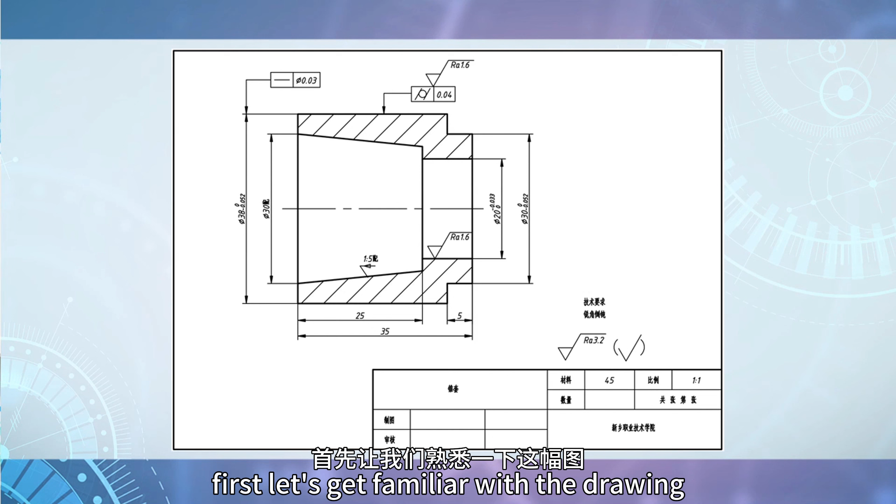First, let's get familiar with the drawing. The first step is to read the title bar. From the title bar, we can see that the part name is a cone sleeve. The material is number 45 steel. The drawing scale is 1:1.

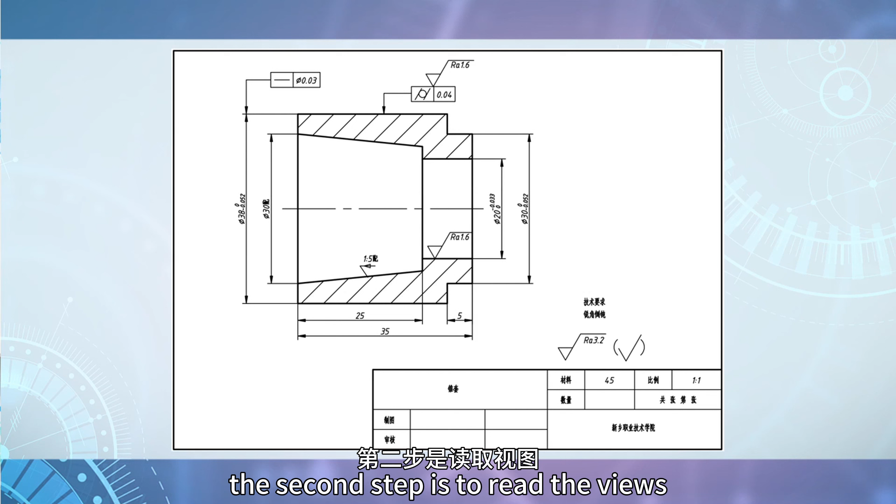The second step is to read the views. First, analyze the expression scheme. This part uses a section view to show the internal structure of the cone sleeve. Next, let's conduct a shape analysis. This drawing represents a sleeve-type part. The external shape is relatively simple.

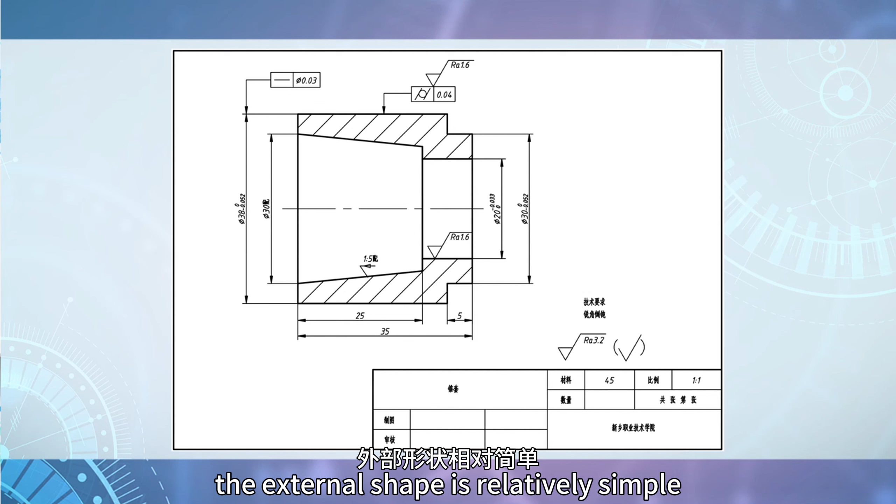It consists of two cylindrical surfaces. The interior consists of an inner cylindrical surface and an inner conical surface. Among them, the taper of the inner conical surface is 1:5.

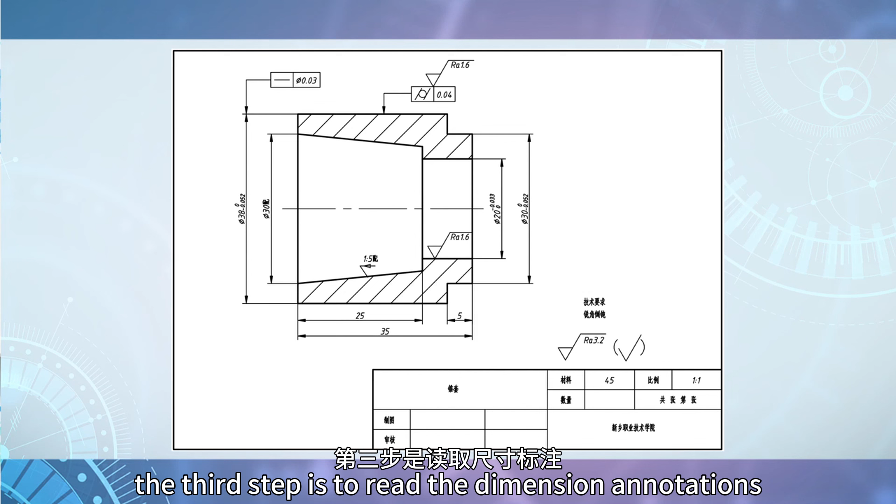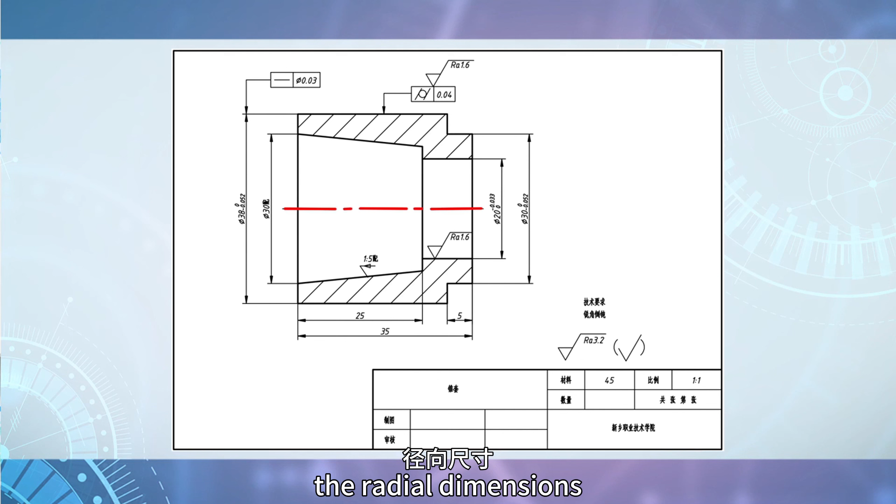The third step is to read the dimension annotations. Overall dimensions: the total length of the cone sleeve is 35, and the diameter is 38. Dimension benchmarks: the axial dimensions of this part are marked with the left end face as the benchmark. The radial dimensions are marked with the axis of the cone sleeve as the benchmark.

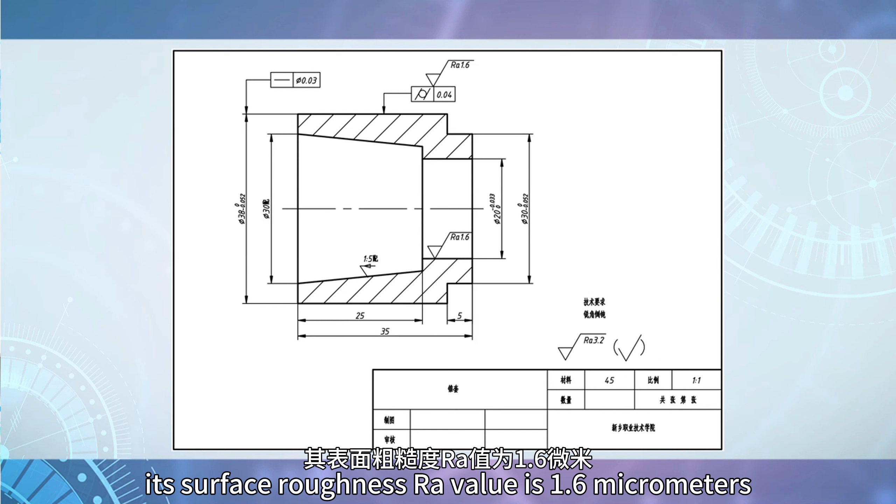The fourth step is to read the technical requirements. First, geometric tolerances. This drawing uses two shape tolerances, straightness and cylindricity. Second, surface roughness. For the cone sleeve, the outer cylindrical surface has the highest quality requirements. Its surface roughness Ra value is 1.6 micrometers. The Ra value for the remaining surfaces is 3.2 micrometers. Third, text notes. Sharp edges should be chamfered.

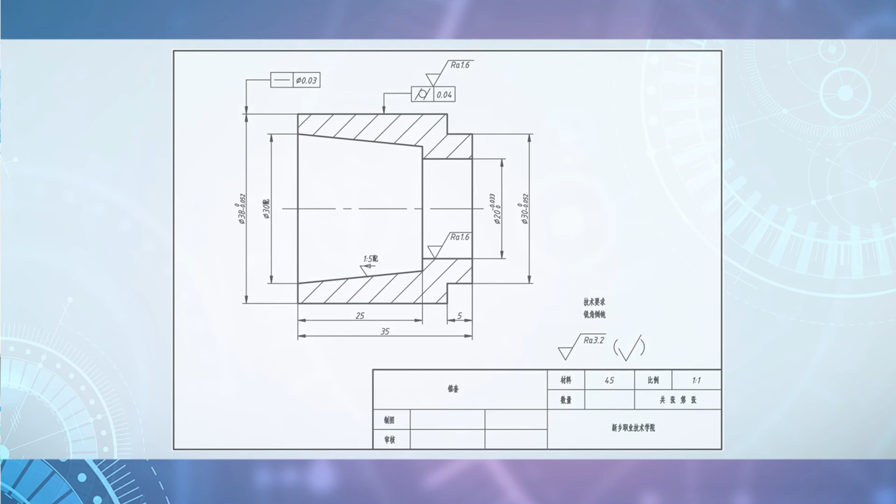When using views to express mechanical parts, the hidden lines on the contours should be drawn with dashed lines. If the internal structure of a mechanical part is very complex, there will be many dashed lines in the view. Too many dashed lines affect the clarity of the view and make it inconvenient for us to draw, read, and annotate dimensions.

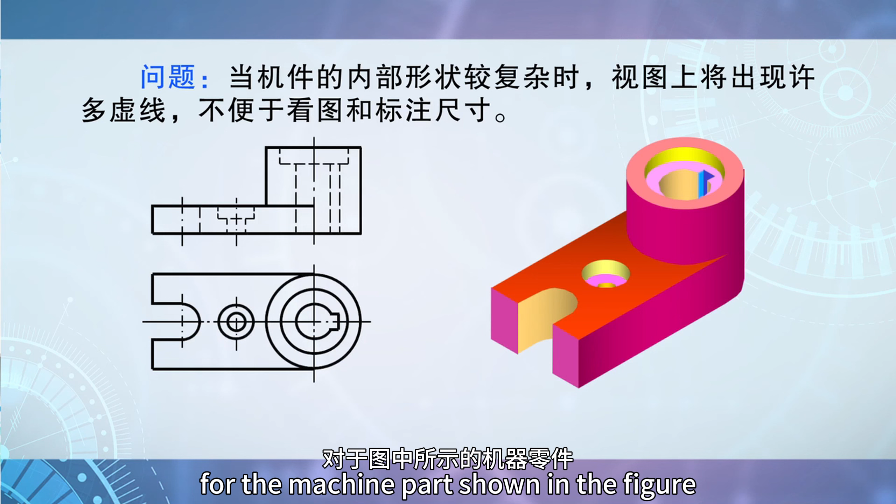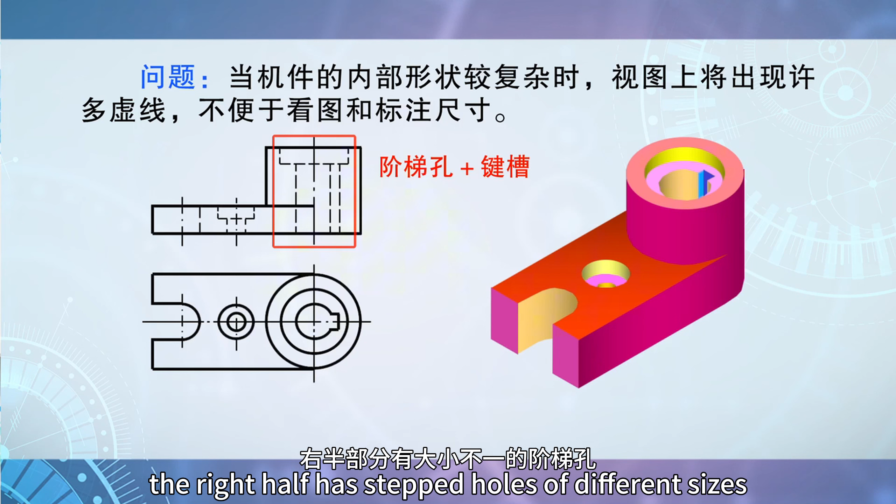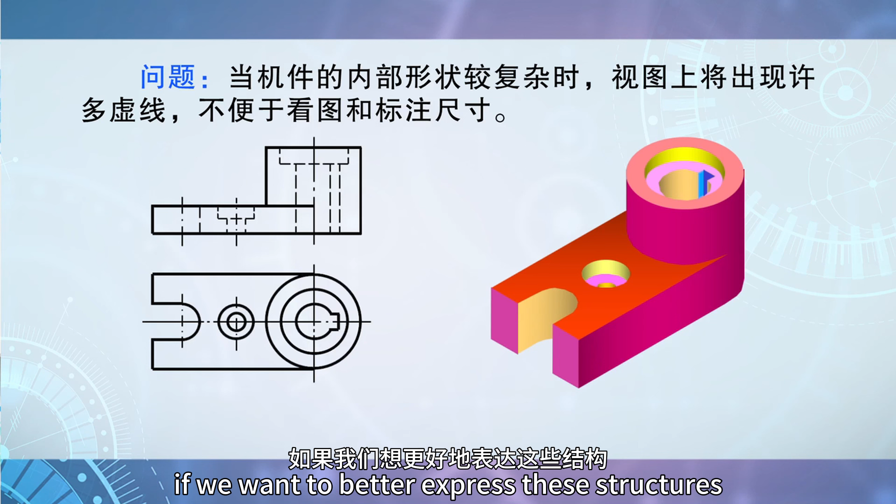For the machine part shown in the figure, the left half of the base plate has a U-shaped groove and a stepped hole. The right half has stepped holes of different sizes, and there are also keyways inside. This results in many dashed lines in the front view. If we want to better express these structures, what method should we use?

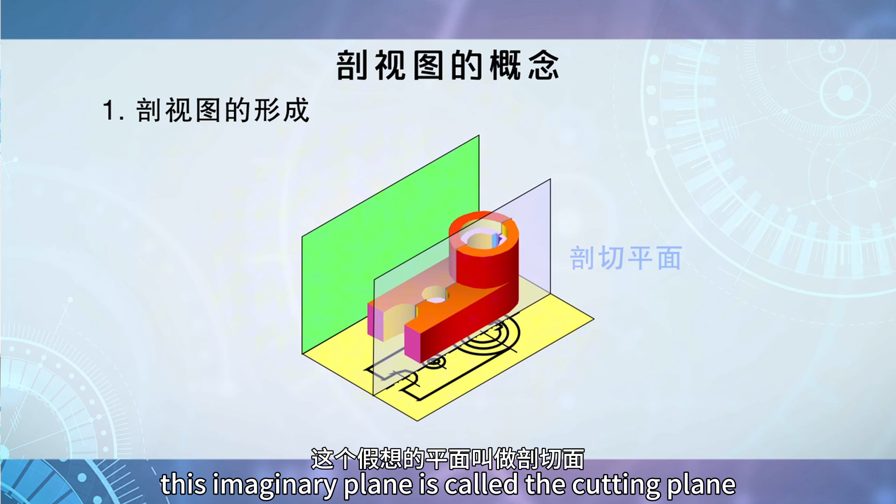Imagine a plane cutting through the middle of the machine part. This imaginary plane is called the cutting plane. We remove the part between the observer and the cutting plane. Then, we project the remaining part onto the projection plane. At this point, the various holes and grooves inside the machine part become visible.

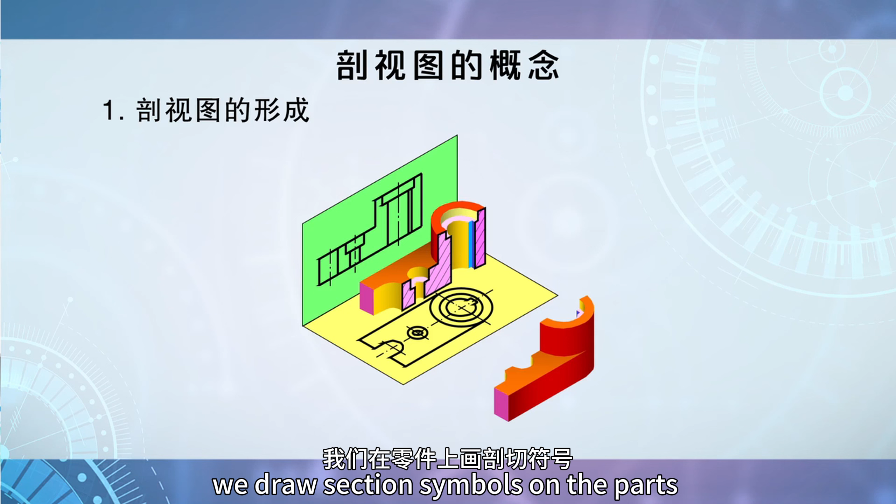To distinguish between the sectioned view and other views, we draw section symbols on the parts where the cutting plane contacts the solid body of the machine part. The drawing produced by this method is called a section view.

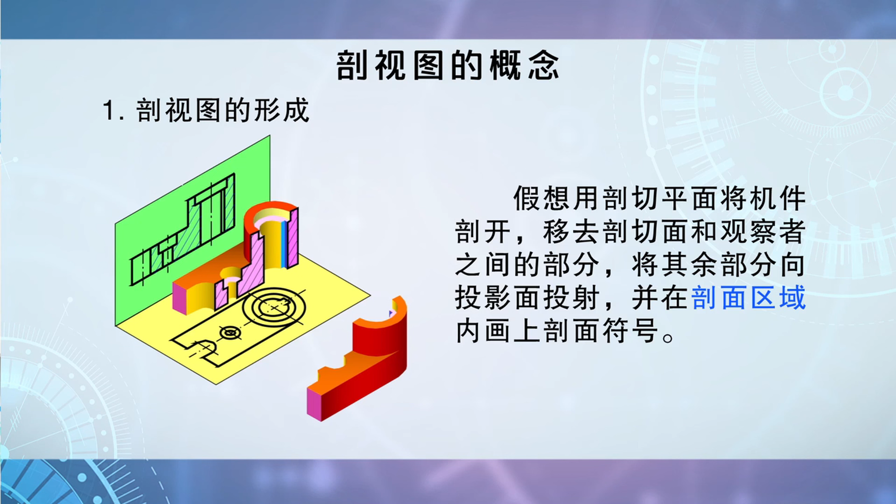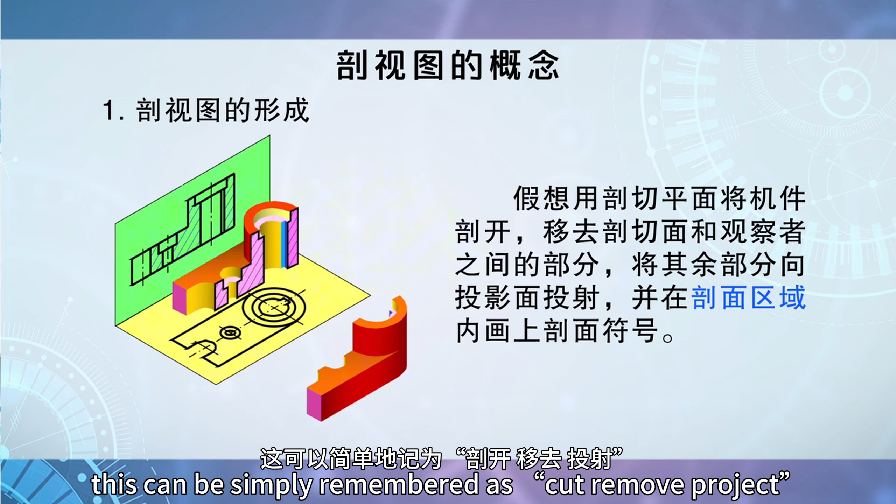Let's summarize the formation process of a section view together. Imagine using a cutting plane to cut through the machine part. Remove the part between the cutting plane and the observer. Project the remaining part onto the projection plane, and draw section symbols in the sectioned area. This can be simply remembered as cut, remove, project.

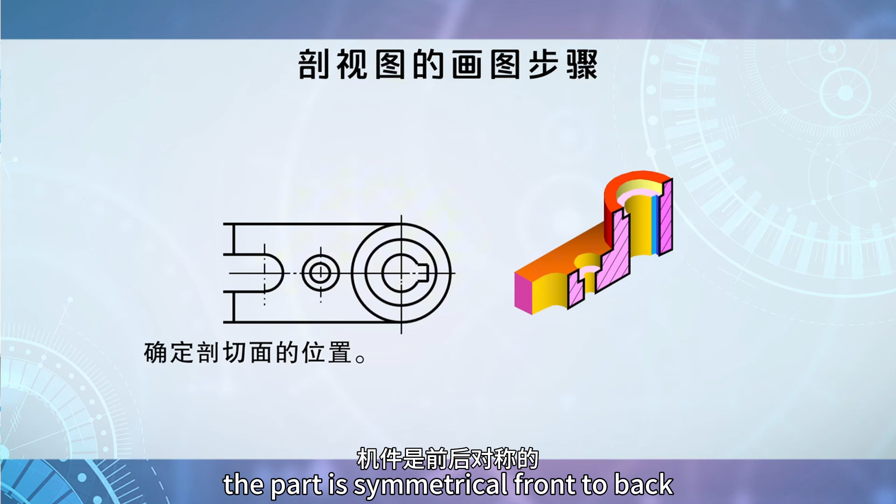How exactly should we draw a section view? Let's take a look at the steps for drawing a section view. First, determine the cutting position of the cutting plane. As shown in the diagram, the part is symmetrical front to back. Therefore, we cut it along the centerline. Second, imagine which part is removed. We remove the part between the observer and the cutting plane.

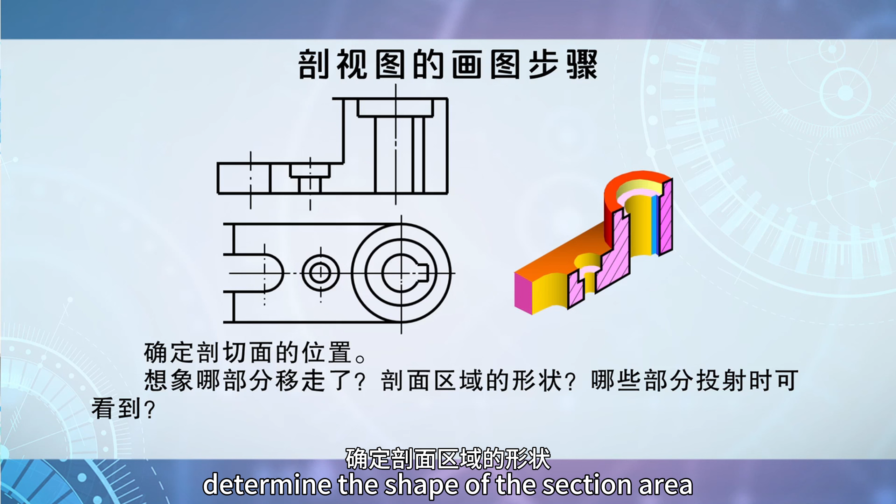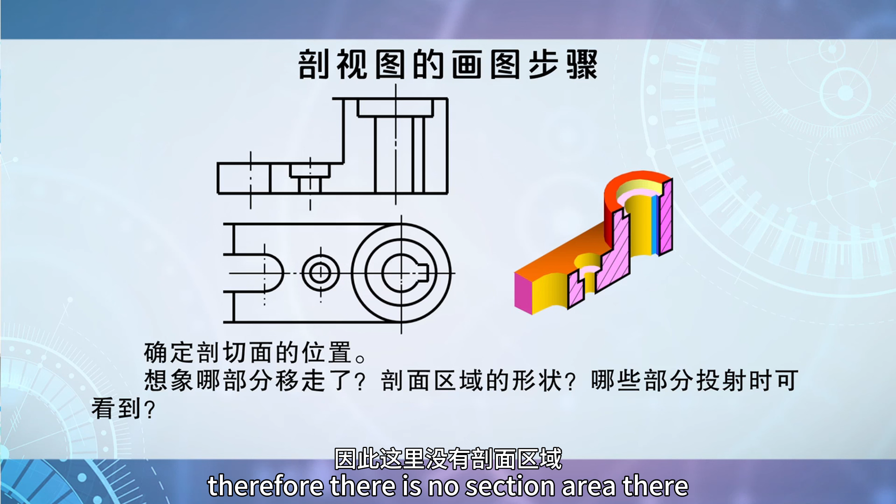Determine the shape of the section area. The section area is the part where the cutting plane contacts the solid part of the component. The U-shaped groove on the left half of the base plate does not contact the cutting plane. Therefore, there is no section area there. However, there is a solid part between the U-shaped groove and the stepped hole. Therefore, this part belongs to the section area.

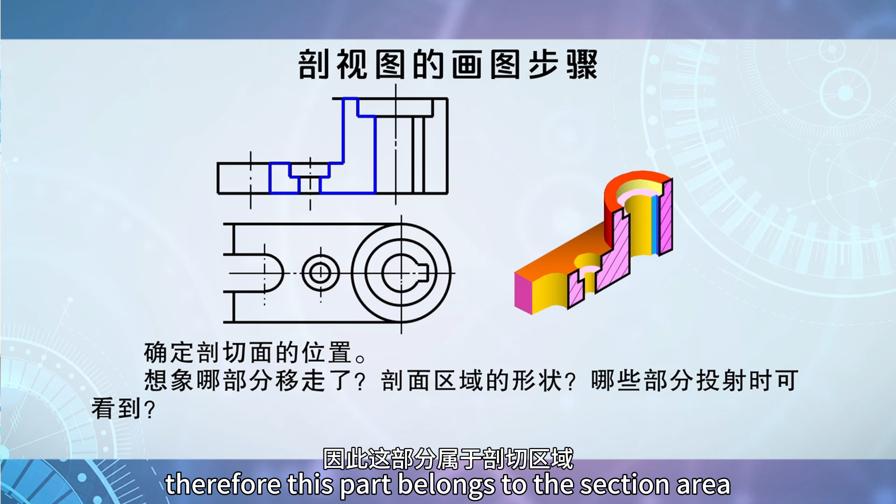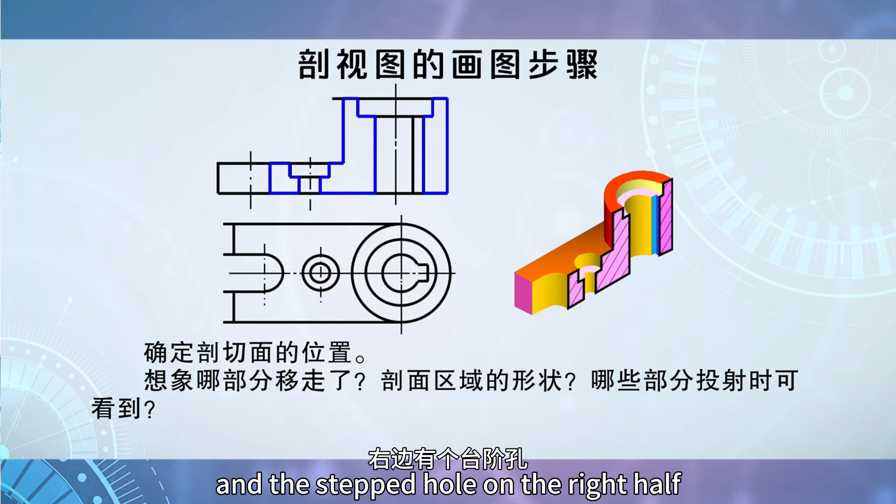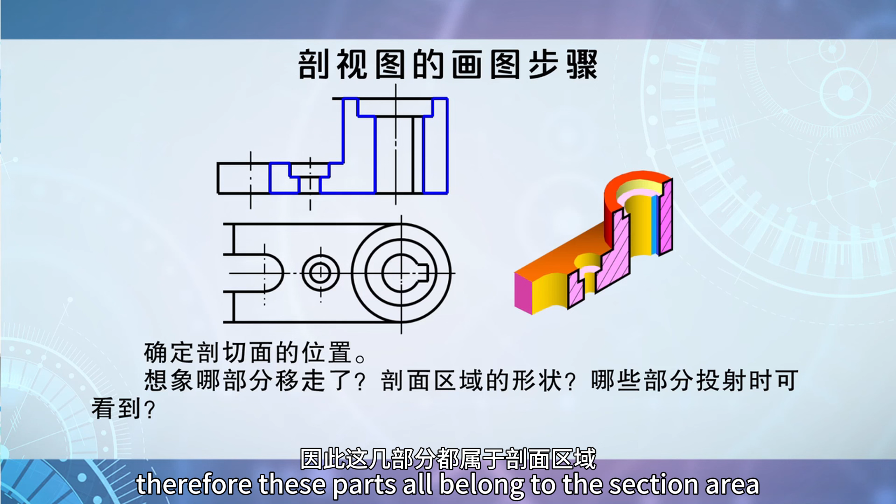At the same time, there is solid contact between the stepped hole on the base plate and the stepped hole on the right half, as well as on the right side of the stepped hole on the right half. Therefore, these parts all belong to the section area. After clarifying which parts are cut, we can see the projection. Pay special attention to the connection lines between the stepped holes and keyways. Finally, draw section symbols in the section area.

Different materials of the component require different section symbols. Section symbols are usually called section lines. When it is not necessary to indicate the material category in the section area, the section symbol can be represented by a general section line. The general section line is a thin solid line. It is best to make it at a 45 degrees angle with the main outline of the drawing, or the symmetry line of the section area.

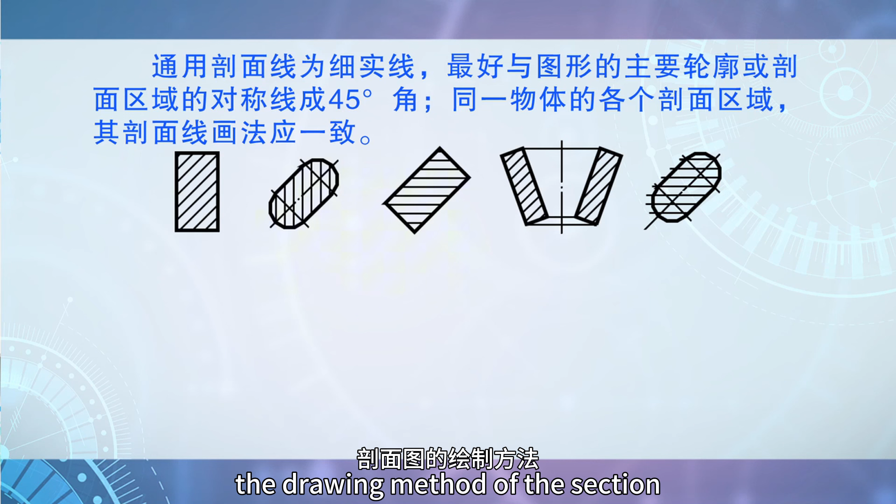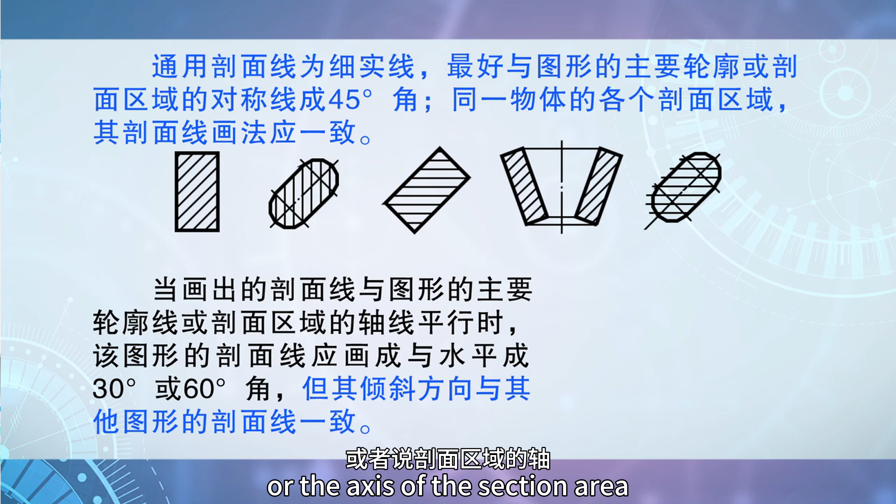For the section areas of the same object, the drawing method of the section lines should be consistent. When the drawn section line is parallel to the main outline of the drawing, or the axis of the section area, the section line should be drawn at a 30 degrees or 60 degrees angle to the horizontal. But its inclination direction should be consistent with that of other section lines. This is how we draw a section view.

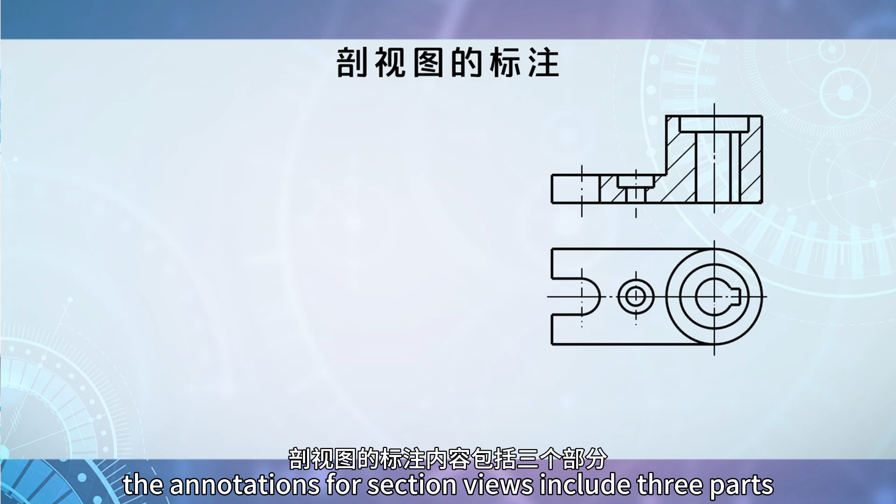So, are there any special requirements for section views? What annotations do we need to make? Next, let's learn about the annotations for section views. The annotations for section views include 3 parts. The first part is the cutting line. The cutting line indicates the position of the cutting plane. It is represented by a thin dot dash line. Generally, it can be omitted.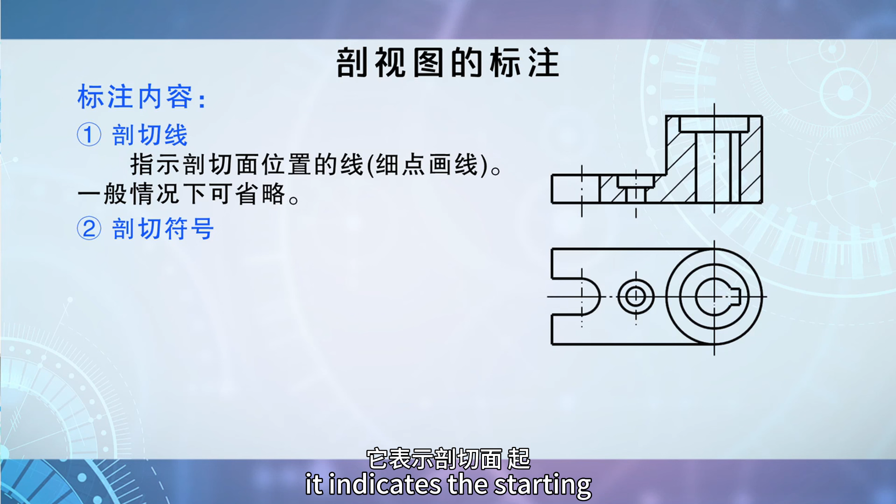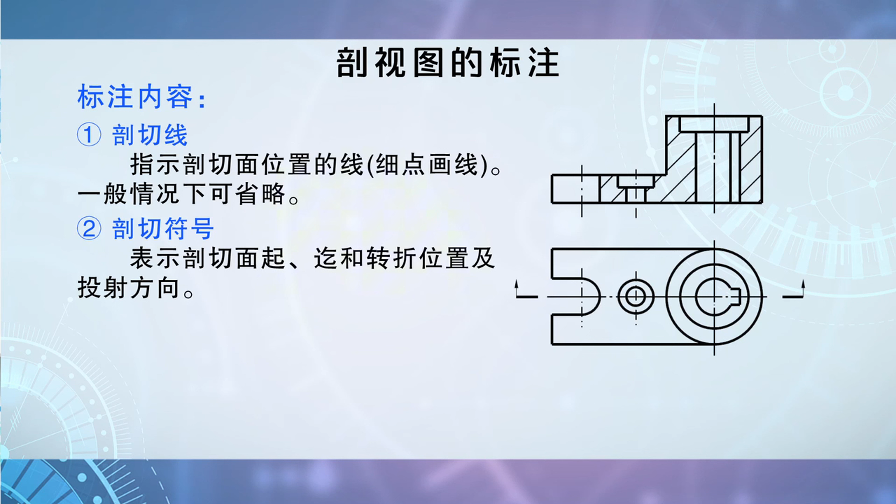The second part is the cutting symbol. It indicates the starting, ending, and turning positions of the cutting plane, as well as the projection direction. It is usually represented by a thick short line to indicate the position of the cutting plane. The line width of the thick short line is 1 or 1.5 times that of the thick solid line. The length of the thick short line is about 6 to 7 millimeters.

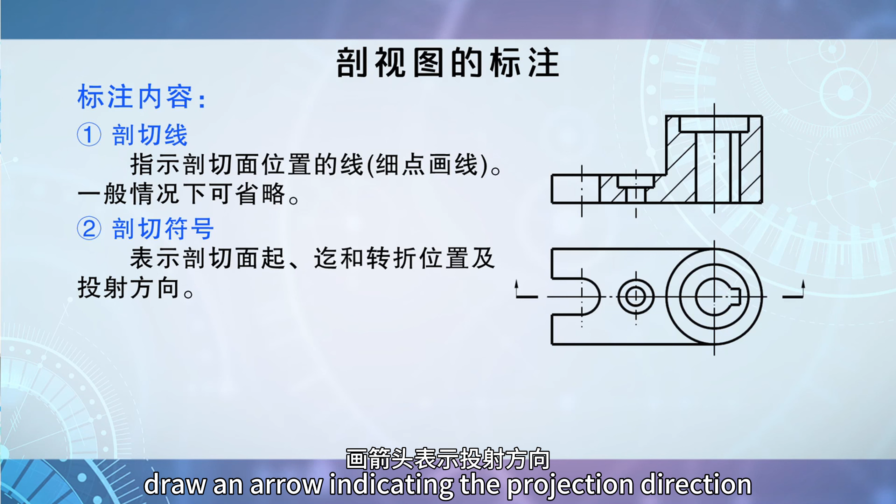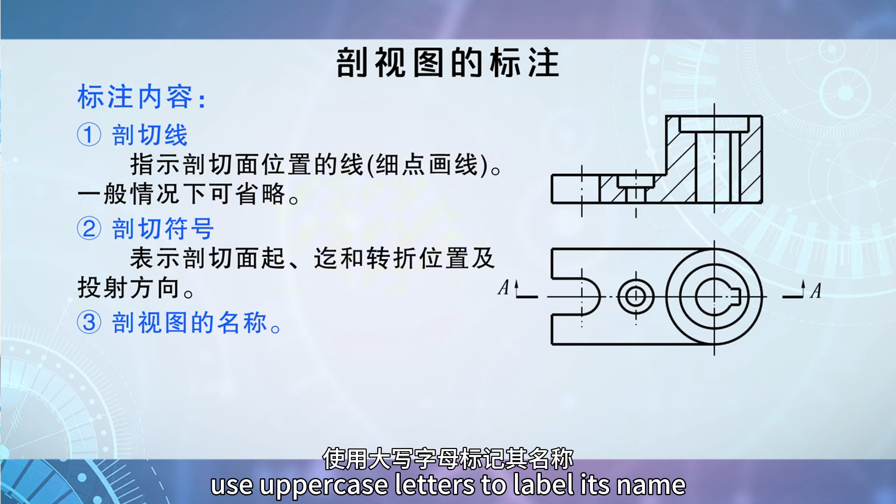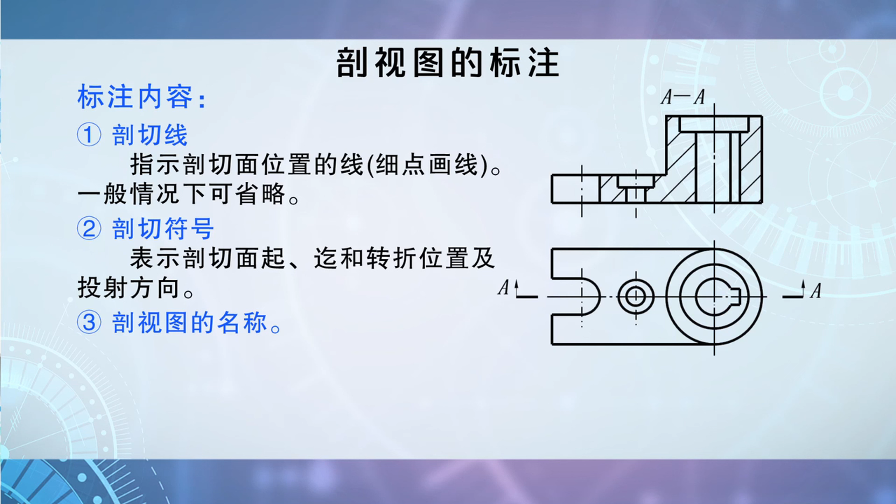To ensure clarity, the thick short line indicating the cutting plane must be clearly separated from the outline of the drawing. Don't cause any misunderstanding. On the outside of the thick, short line, draw an arrow indicating the projection direction. The third part is the name of the section view. Above the section view, use uppercase letters to label its name, such as X-X. And write the same letters on the view where the cutting symbol is marked. For example, A-A in the diagram.

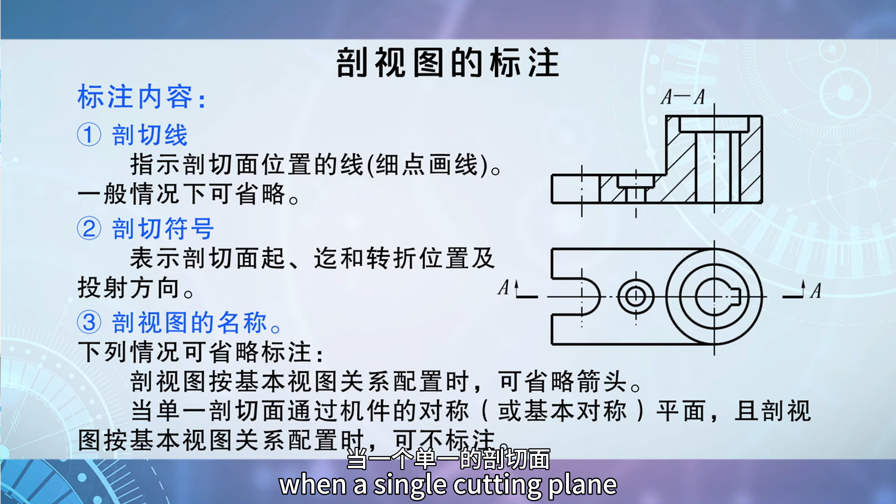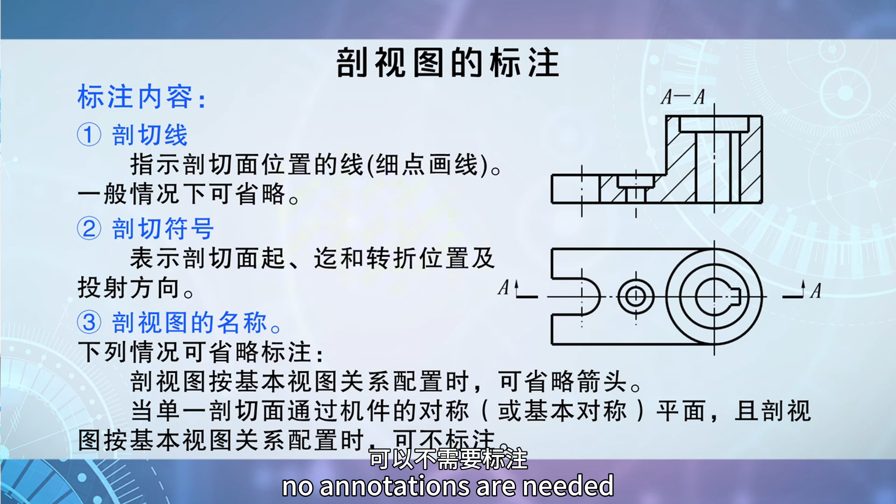Annotations can be omitted in the following 2 cases. One is when the section view is arranged according to the basic view relationship, the arrow can be omitted. The second case is when a single cutting plane passes through the symmetrical plane of the component, and the section view is arranged according to the basic view relationship. No annotations are needed. When drawing section views, there are many difficulties we need to master. Let's go through the key points we need to pay attention to.

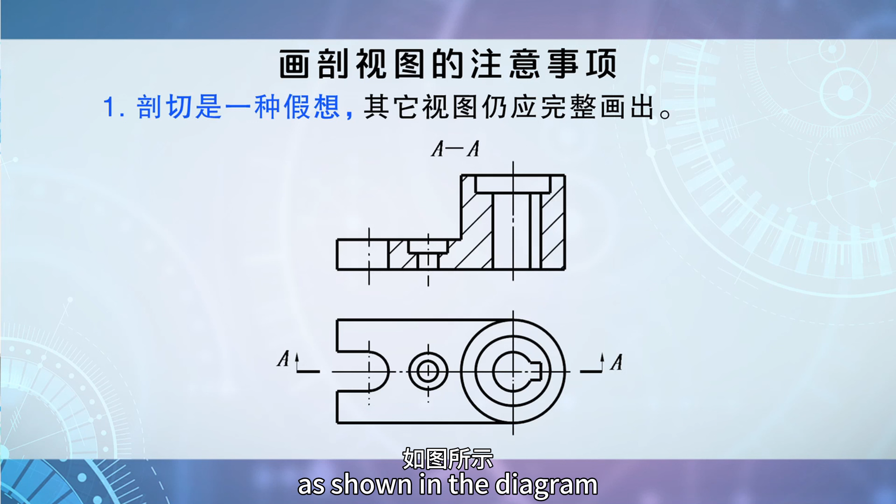First, we say that a section view is an imaginary view created by cutting open the machine part. Therefore, besides using the imaginary cutting method for section views, other views should not be affected by the section view. We need to draw complete shapes. As shown in the diagram, the front view uses the section view method, while the top view still shows the complete shape.

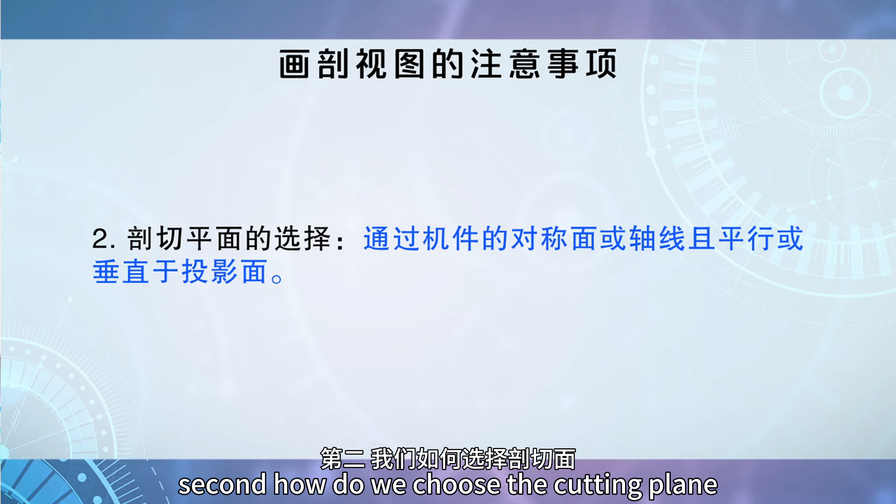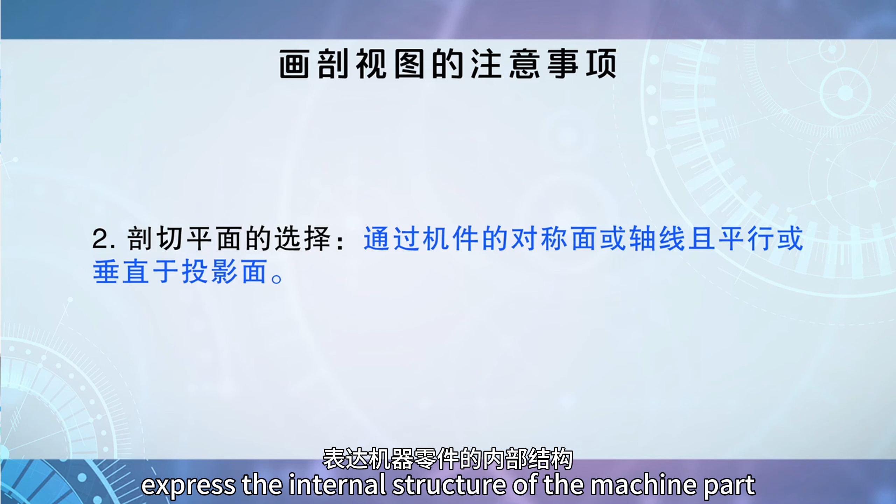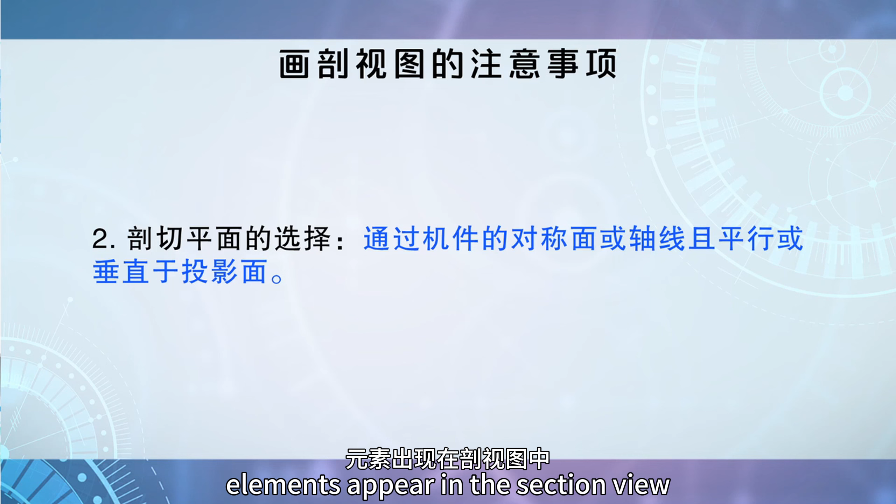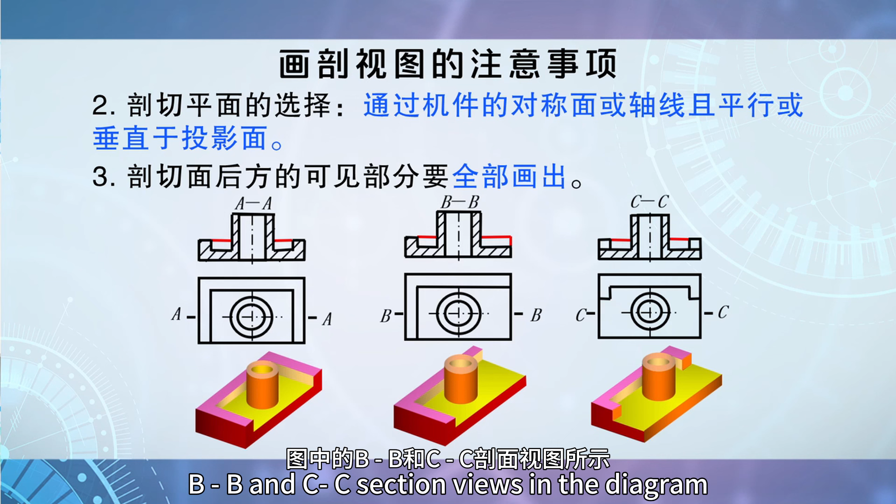Second, how do we choose the cutting plane when drawing section views? We use the section view method to clearly express the internal structure of the machine part. Therefore, our cutting plane generally chooses to pass through the symmetrical plane, or basically symmetrical plane of the machine part. This ensures that no incomplete elements appear in the section view. Third, when drawing section views, all visible outline lines behind the cutting plane should be fully drawn without omission, as shown in the A-A, B-B, and C-C section views in the diagram.

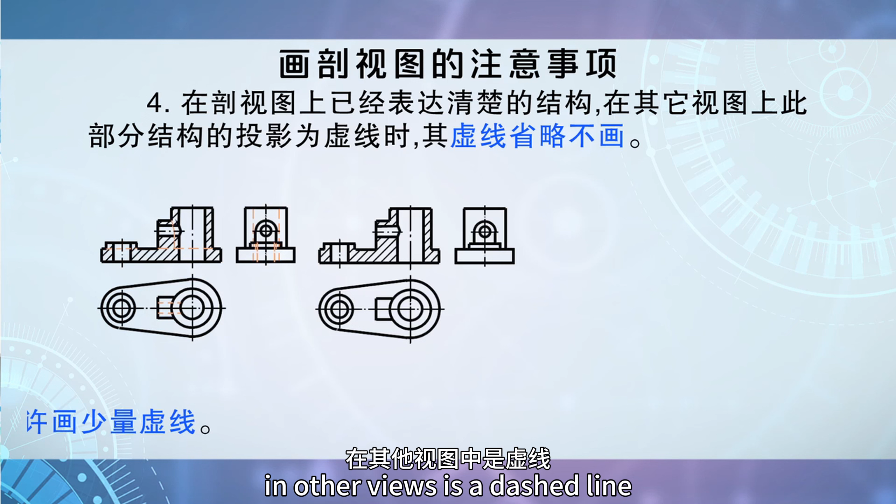Fourth, section views are used in conjunction with other views to express the internal structure of an object. If a part has already been clearly expressed in other views, then the dashed lines in the section view can be omitted. For example, the dashed lines for the projection of the base plate in the diagram do not need to be drawn in the section view. Similarly, if a part has already been clearly expressed in the section view, and the projection of this part's structure in other views is a dashed line, then the dashed line can also be omitted. However, if a part is not clearly expressed, a few dashed lines can be drawn. That's all about section views.